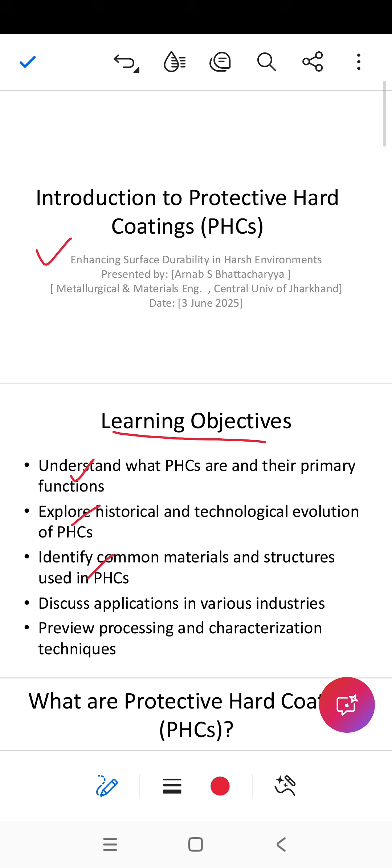Slide 3, What are protective hard coatings? PHCs are thin films, usually under 10 micrometers, deposited on material surfaces to improve properties like wear resistance, oxidation protection, and surface hardness. Despite their small thickness, their impact is massive, especially in aerospace, biomedical, and tool industries.

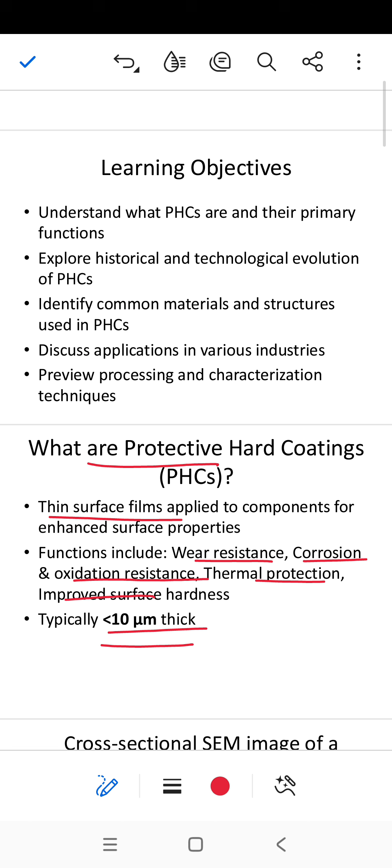Slide 4, cross-sectional SEM image of a coated substrate. Here you see an SEM image showing a typical coated structure. Note the sharp interface between the coating and substrate. A strong interface with no voids or delamination indicates excellent adhesion. Coating materials like TiN or Al2O3 are dense and smooth, while the underlying metal, like steel, has a rougher, grainy structure. This contrast is vital for function and bonding.

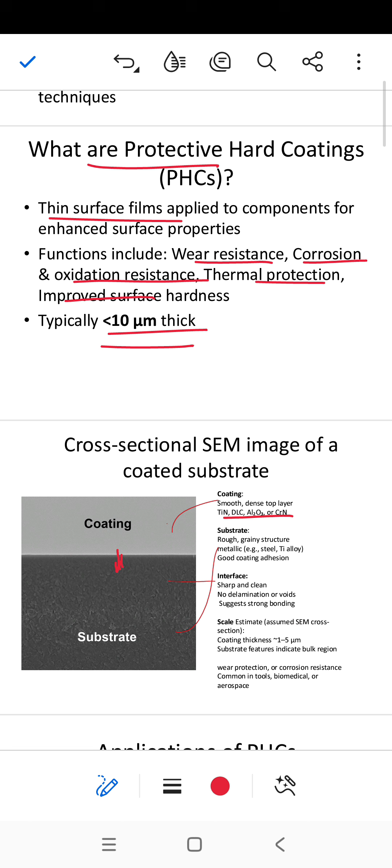Slide 5, Applications of PHCs. PHCs find diverse applications. In aerospace, they protect turbine blades from high temperatures. In automotive, they reduce engine wear. MEMS, NEMS, and electronics use them for reliability. In biomedical fields, coatings on implants prevent wear and rejection. And of course, cutting tools benefit from reduced wear and extended life.

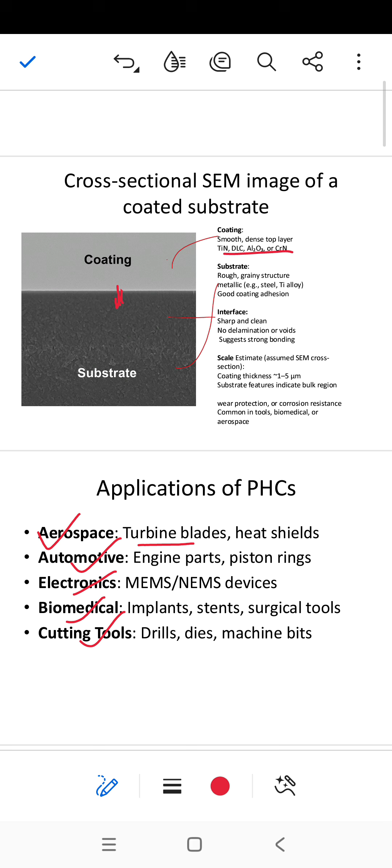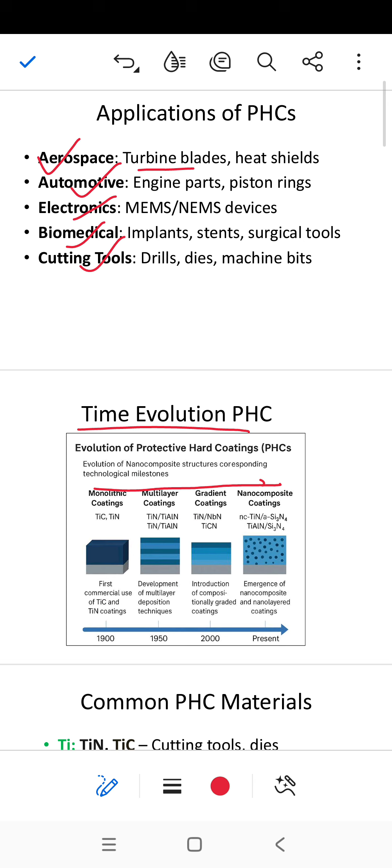Slide 6. The timeline of PHC development reflects technological maturity. From simple monolayer coatings, we've moved to more complex multi-layer and nanocomposite structures that offer a synergy of toughness, thermal stability, and resistance.

Slide 7, Common PHC materials. We see a wide range of elements. Titanium forms TiN and TiC, widely used in machining tools. Boron gives rise to extremely hard coatings like TiB2. Silicon-based coatings like Si3N4 resist high temperatures. Carbon, in the form of DLC, offers low friction and high hardness. Nitrogen-containing compounds like TiN and CrN give chemical stability.

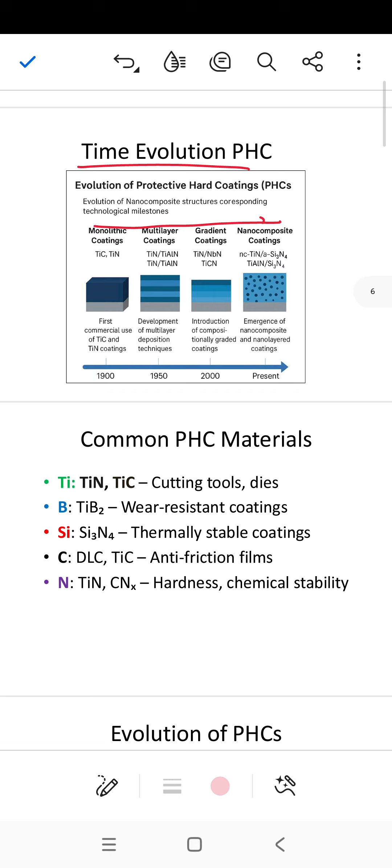Slide 8, Evolution of PHCs. We can divide the evolution into 3 main stages. 1, Monolithic coatings, simple carbides and nitrides. 2, Multilayers, these improve toughness and barrier properties. 3, Nanocomposites, the cutting edge today, offering nanoscale engineering and multifunctionality.

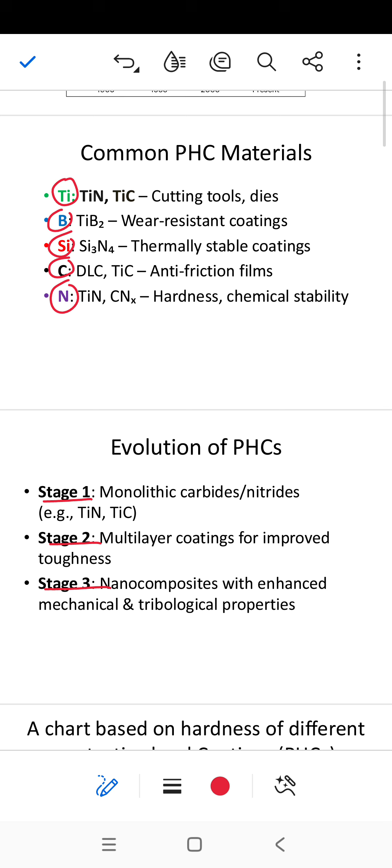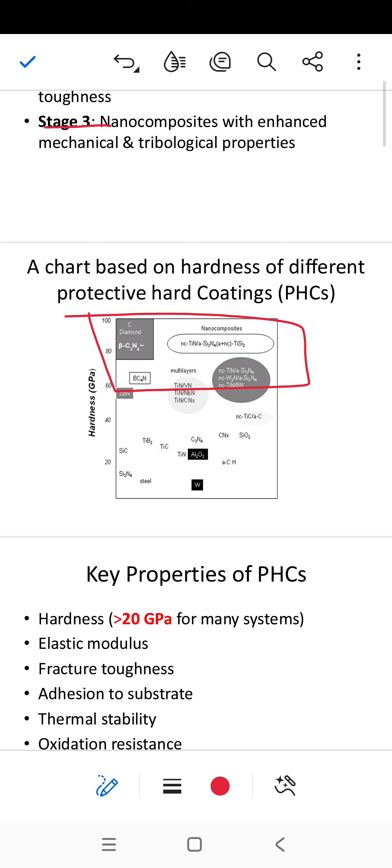Slide 9, Hardness chart of PHCs. This comparative hardness chart shows how PHCs surpass conventional materials. While bulk materials struggle under 10 to 15 GPa, advanced PHCs exceed 20 to 30 GPa, and some nanocomposites even go beyond 40 GPa, entering the superhard regime.

Slide 10, Key properties of PHCs. We evaluate PHCs based on hardness and elastic modulus, mechanical strength, fracture toughness, resistance to cracking, adhesion to the substrate, key for reliability, thermal stability, and oxidation resistance for high temperature performance.

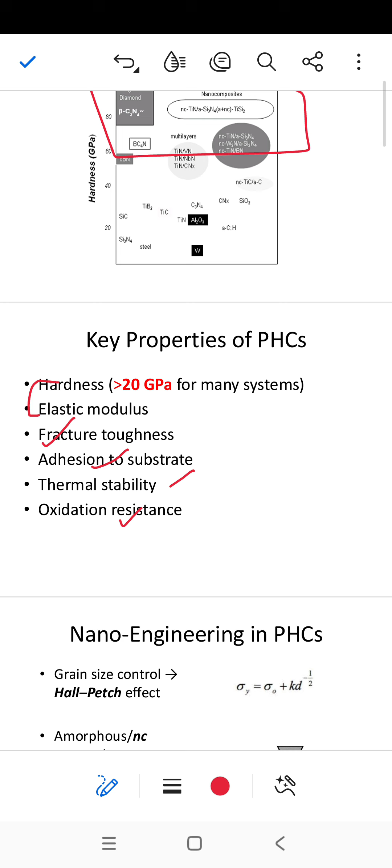Slide 11, Nanoengineering in PHCs. Nanoengineering has taken PHCs to the next level. Smaller grain sizes activate the Hall-Petch effect, increasing hardness. Composite structures with nanocrystalline phases or amorphous matrices enhance crack deflection and barrier behavior, critical for high-stress environments.

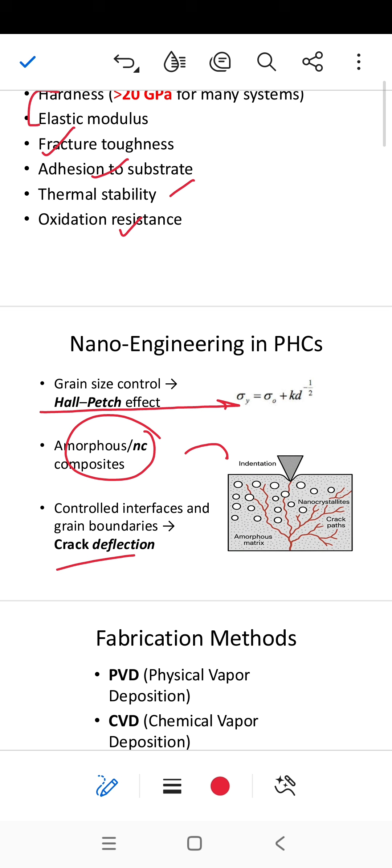Slide 12, Fabrication methods. Key deposition techniques include PVD, high vacuum processes like sputtering and evaporation. CVD, chemical reactions at the surface deposit the coating. Sol-gel and plasma spraying for large area or thermal barrier coatings. Emerging methods like HIPIMS and magnetron sputtering offer superior film quality and control.

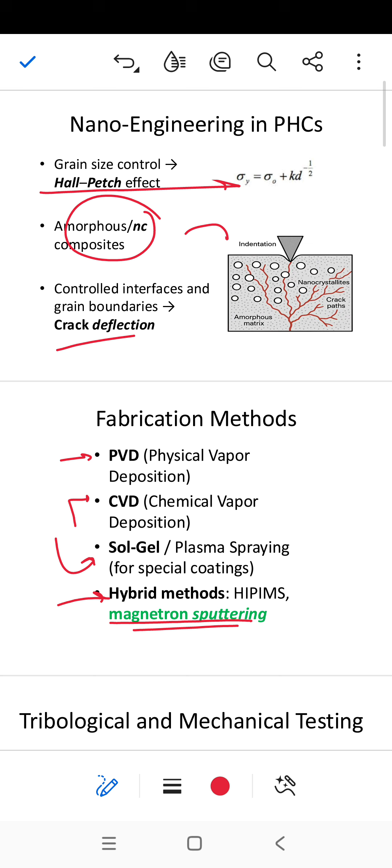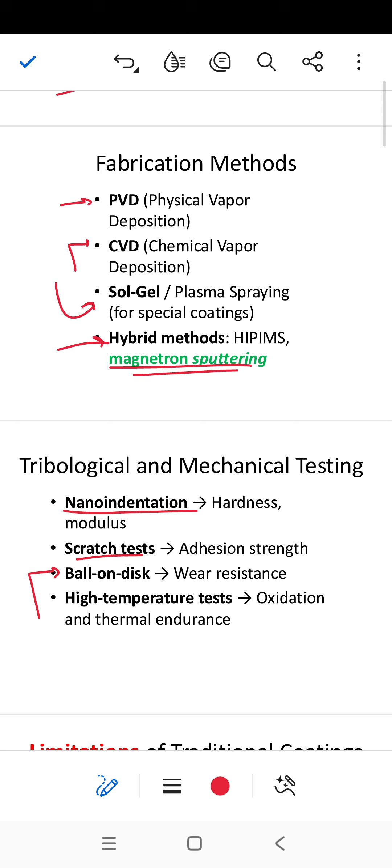Slide 13, Tribological and mechanical testing. Testing is essential. Nanoindentation gives local hardness and modulus. Scratch tests assess adhesion by controlled delamination. Ball-on-disc setups measure wear under realistic sliding. High-temperature rigs test oxidation and structural endurance.

Slide 14, Limitations of traditional coatings. Despite their strengths, traditional coatings can suffer from brittleness, delamination at elevated temperatures, poor adhesion on rough surfaces, and limited oxidation resistance. These are being actively addressed in next-gen coatings.

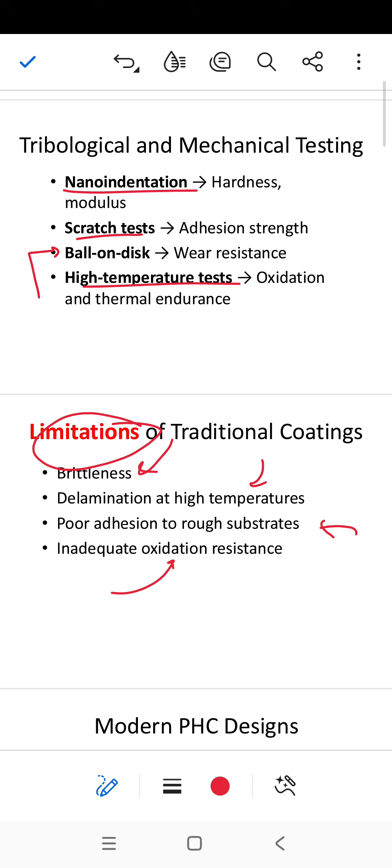Slide 15, Modern PHC designs. To tackle earlier drawbacks, modern PHC designs involve superlattices, layered structures like TiN/TiAlN improving toughness and oxidation resistance, nanocomposites combining hardness and ductility, e.g. TiSiN, and multifunctional coatings, for example, biocompatible plus corrosion-resistant hard coatings for implants.

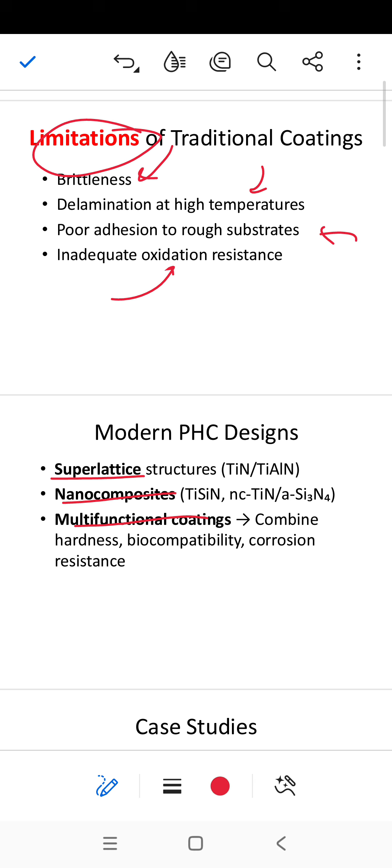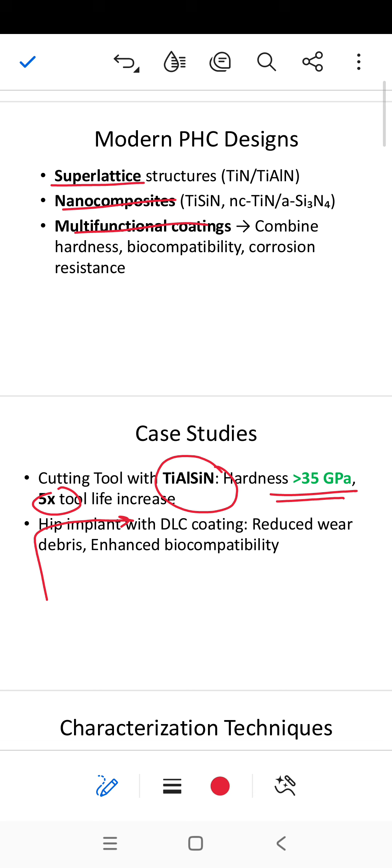Slide 16, Case studies. Two real-world examples. 1, TiAlSiN coatings on cutting tools push hardness above 35 GPa and increase tool life by up to 5 times. 2, DLC coatings on hip implants reduce wear particles, improving biocompatibility and patient outcomes.

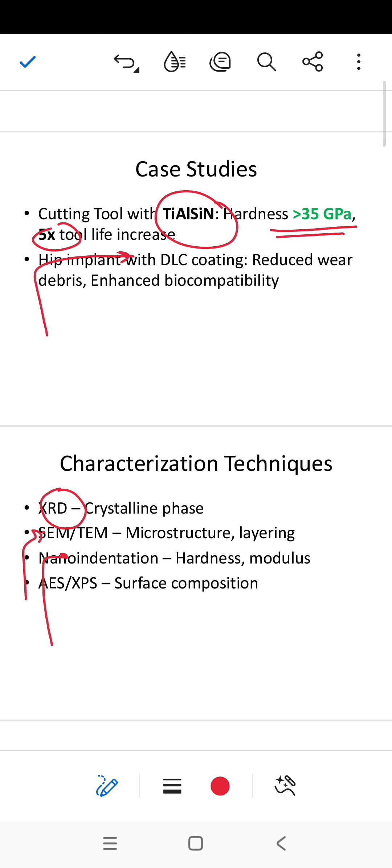Slide 17, Characterization techniques. Characterizing coatings requires multiple tools: XRD for crystallinity and phase identification, SEM-TEM for microstructural details, nanoindentation for mechanical response, AES-XPS for surface composition and chemical states.

Slide 18, Summary. To wrap up, PHCs are essential for advanced engineering systems. They've evolved from basic carbides to smart nanocomposites. Material choice and design must be tailored to application needs. Future research is focusing on multifunctional, self-healing, or adaptive coatings.

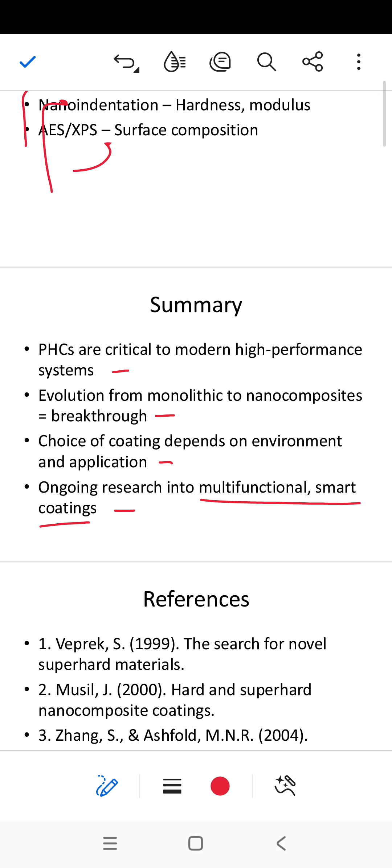The key literature guiding this field includes works by Veprek, Musil, and Zhang. These authors have made foundational contributions to the understanding and advancement of hard and superhard coatings.